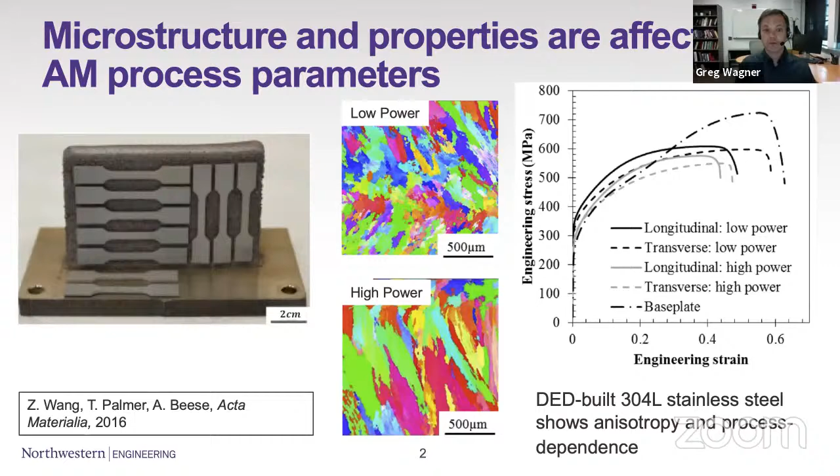So here's some work from the Penn State group, where for a directed energy deposition experiment, they ran the same build with both low and high power, and saw an obvious difference in the resulting microstructure, right? So smaller grains for the low power case. And there's a resulting difference in the material properties too. As you might expect with the smaller grains, the low power case ends up with a little bit higher failure strength. And there's also an obvious anisotropy because of the anisotropy of the build and the resulting structure.

And it can affect not just properties, but even whether or not a particular material can be built. We know that there are materials like aluminum that don't lend themselves very well to additive manufacturing. Typically, these are the same materials that don't lend themselves to welding, and a lot of times it's because they have phenomena like hot cracking. So this paper from a few years ago in Nature demonstrated that this 7000 series aluminum, under standard additive manufacturing conditions, developed cracks, and here's the resulting stress strain curve: essentially they couldn't get a coherent material that could bear a load.

But by inoculating it with zirconium nanoparticles, they were able to get a finer grain structure. This finer grain structure alleviated a lot of the problems with cracking, and led to a much stronger material, and maybe just as importantly, a material that could be built with additive manufacturing. So these are two examples of ways in which the process can affect the properties and the buildability of a particular material.

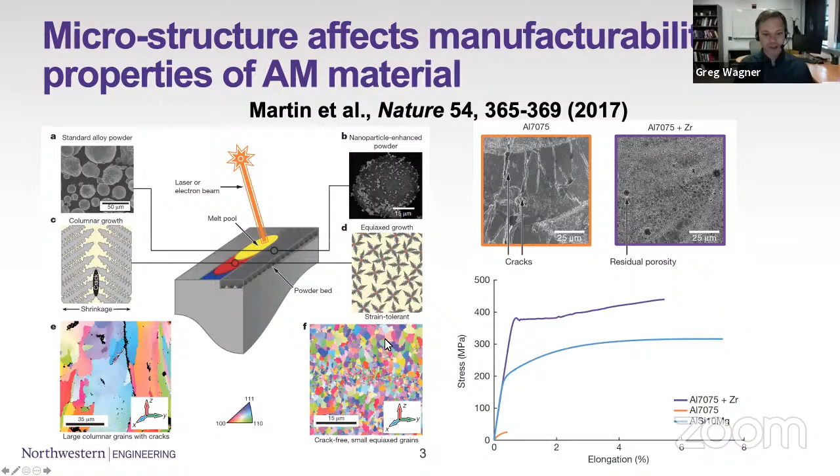So in my group, we focus on simulations, and my background is mostly on development of numerical methods and how they can be applied to problems like this.

We're looking at this problem at a few different scales, and I'll talk about a couple of these in today's talk. So we have active work on part scale modeling. So this is trying to predict, in particular, the temperature field in our case, over a build, over many layers. So think about the multiple millimeters or centimeter scales.

We are also interested in modeling down at the powder or the melt pool scale. So this is now down at the hundreds of microns scale. And this is where those multi-phase or moving interface simulation techniques come in. And we also coupled those types of results to microstructure formation models. And I'm not going to talk as much about that today, but this is also an area of interest for us.

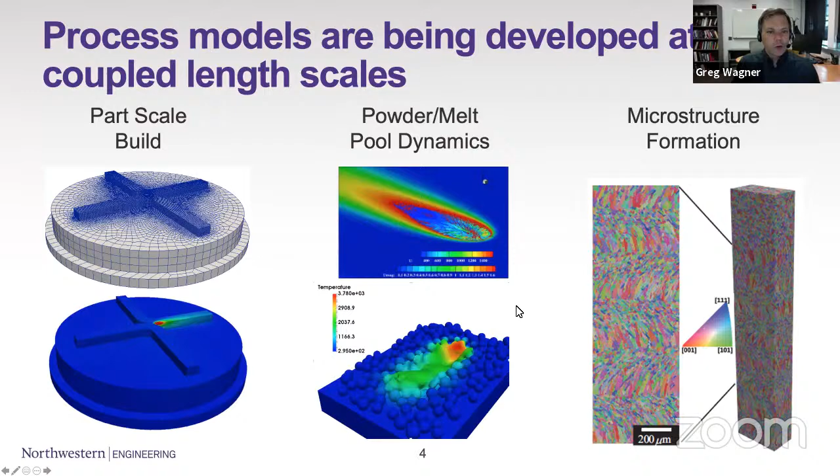So what I will talk about on these first two cases, I'm going to talk about some of our modeling techniques, but then also talk about how we're using some data-driven or machine learning methods in order to, I think, extend the usefulness of our results. So two kind of mini stories that I'm going to tell, first at the part scale and then at the powder scale.

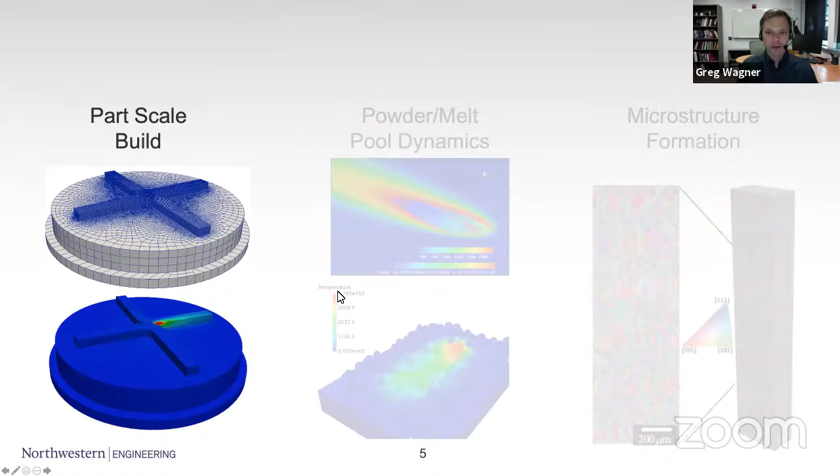So on the part scale, we have developed a finite element model of the thermal history throughout a part. And this is a fairly straightforward model. It's just solving the heat equation in enthalpy form. And this allows us, I don't know how well movies are coming across on the video, sorry. But we can build a part, trace the thermal history throughout the part.

Basically, what we're doing is tracking the same laser path in detail, right, at the kind of laser scale. So we're capturing all of the details in the laser path, the material addition. As material gets added, of course, the complexities in the simulation are that you change your boundaries and you're activating elements and things like that. But a lot of this turns out to be bookkeeping.

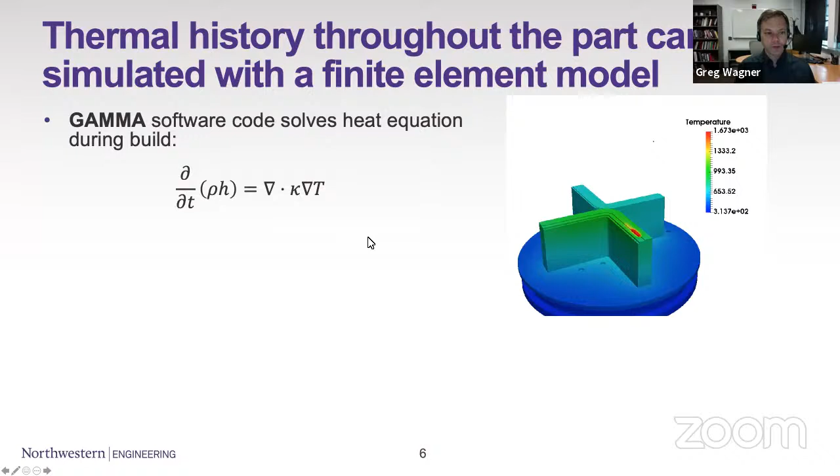The formulation that we're using in this case is an effective specific heat model. So we're capturing the latent heat in this case, but we're capturing it through a modified specific heat that basically has this kind of smeared out jump condition across the solidification of the liquid, the solidus to liquidus region. So the model itself is fairly straightforward.

One problem with models like this, if you've worked with them at all, is validating the temperature history out of these. There are still very few ways to get detailed and accurate temperature measurements from an additive manufacturing build, whether it's the directed energy deposition or powder bed fusion process. It's hard to get thermocouples or things like that very close.

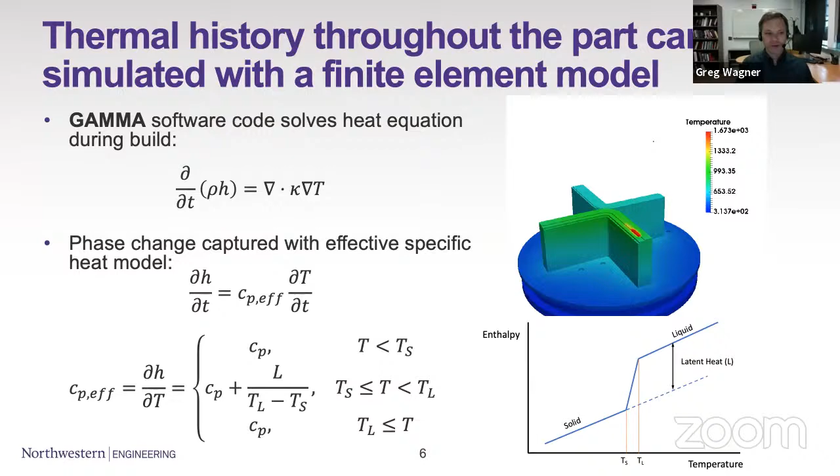So one way where this can be done, at least with some relative accuracy that takes some calibration, is through IR camera data. So we've taken advantage of this in order to try to validate our part scale models. So these are experiments that were done by basically a Northwestern grad student in a group that we collaborate with,

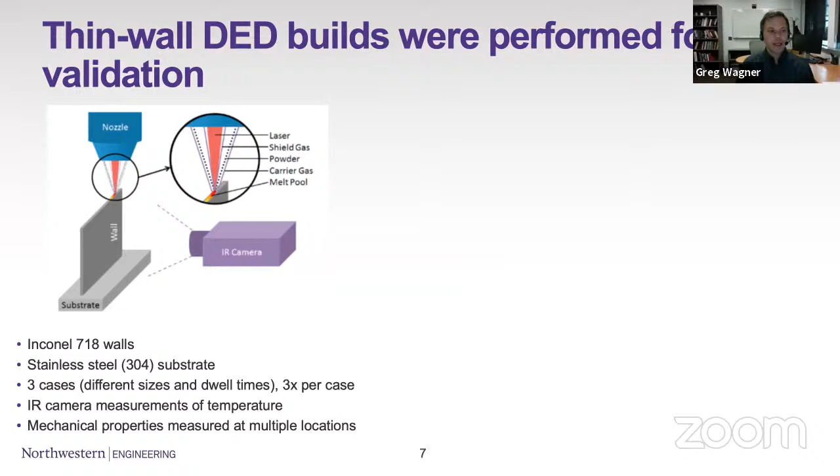where she built several Inconel walls, Inconel 718, 3 different size walls, or 3 different sets of process parameters at least, so different sizes and dwell times for these different walls, and used IR camera data in order to get temperature histories. By the way, Jennifer Bennett was the student who did this work. She is now an assistant professor, or about to start as an assistant professor at West Point.

So this allowed us to get temperature data throughout the part, or at least on the surface of the part, as a function of time. Each one of these walls had a number of sample points, either 9 or 12, depending on the size of the wall.

And so in addition, we were able to take sample specimens from these walls and measure the mechanical properties. So things like the elastic modulus. With tensile tests, we got the stress and strain at yield and failure. And UTS is one that I'll show in a few cases here, the ultimate tensile stress.

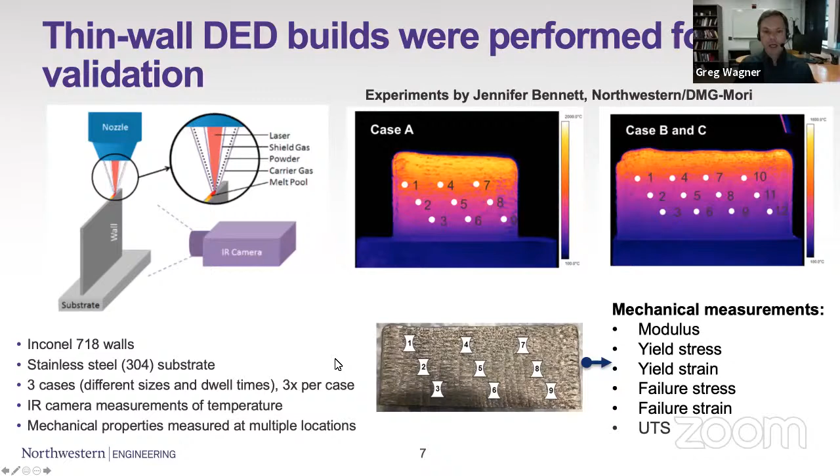So we have a number of points where we have both a measured temperature field, at least we have IR data that purports to give us a measured temperature field. We have property data at those same points. To that, of course, we can add our simulation. So we simulated the same case using our finite element code.

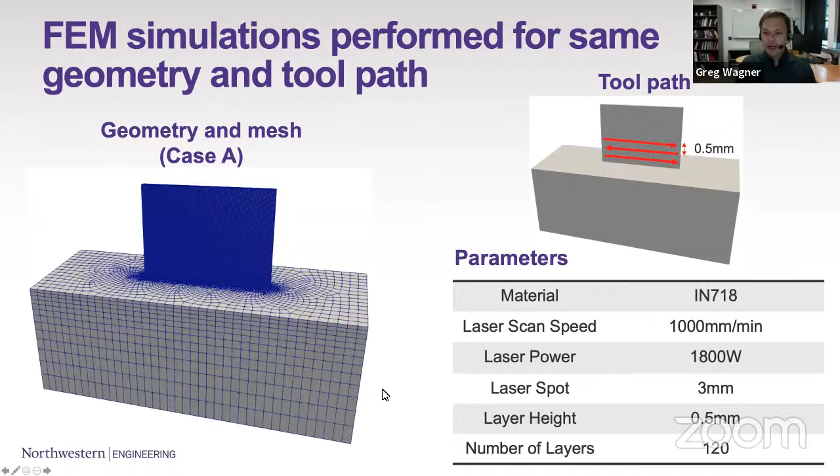The mesh, or representative mesh, is what you see on the left here. The toolpath was fairly simple, just a single scan wall with a layer height of 0.5 millimeter. So this is a directed energy deposition where the scale itself is fairly large compared to a typical powder bed method. And so we were able to simulate that same case.

It starts to cool. One other thing you can note is that the experiments are not able to capture the initial heating of each point very well. So the region through the actual melting temperature, which is about 1400 or 1500 degrees K in this case, the experiments are not getting data there. And in part, it's because the emissivity of this material is changing as it changes phase, and so it's hard to get reliable data, at least in these experiments that were done here, from the melt pool or from that melt bead itself.

So in a way, the simulation at least predicts that we get above the melting temperature, which the experimental data doesn't show. I think in that initial heat up region, the simulations are probably the best data that we have to work with. So if we're interested in cooling rates and things like that, it's the simulation data that we want to be able to query for that. And that's important because, of course, that's what we'd like to be able to correlate with the properties.

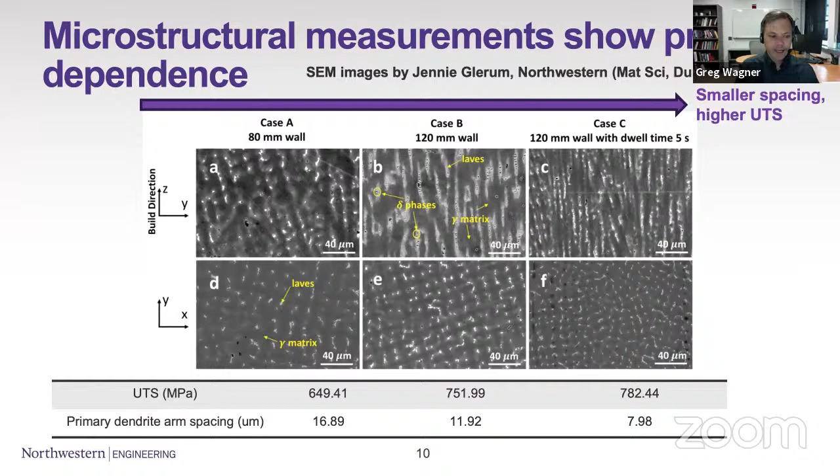Looking a little bit more in depth at that, we can compare that with the simulation data. And again, this particular result is not so surprising. So if we look at data across those 3 cases, and compare first the computed cooling rate. So this is from our finite element simulation, these bars on the left. Everything here is normalized according to the mean. So 1.0 would be our average case across these. So across these 3 cases, the cooling rate is increasing.

It's really just a result of the fact that there's a longer amount of time in between each laser pass or between each build pass at this scale. So the cooling rate is increasing across those 3 cases. The dendrite arm spacing decreases across those. And then there's a resulting change in the material properties for each of those different microstructures. So the strength in particular goes up as the microstructure gets smaller, which again is fairly well expected. So that's great. So we can use our temperature histories in order to back out a cooling rate and say something at least about the expected microstructure and properties.

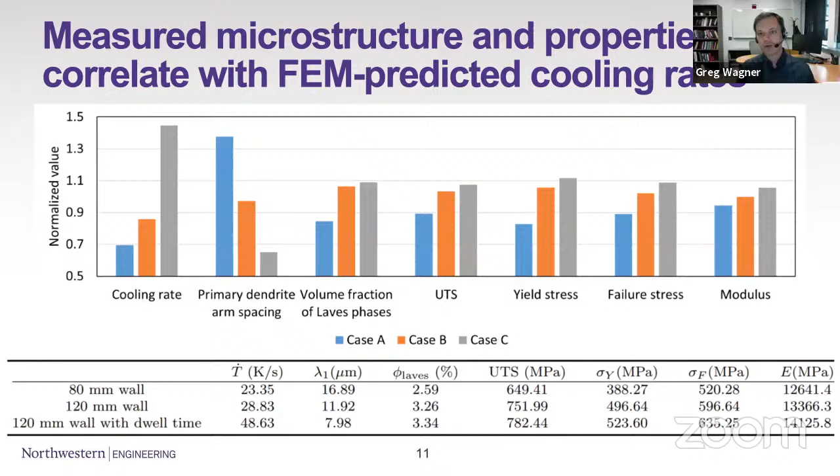Things get a little bit harder to understand. So those were averages over each wall. If we look at individual locations in each wall, though, the story gets a little bit murkier. So if we take 3 different points in a single wall and look at their temperature histories, if you think about it, it makes sense. So point 1 is toward the top of the wall, point 8 is toward the middle, point 12 is more toward the bottom.

Toward the bottom of the build, the cooling rate is the highest because that's where you're closest to the substrate. You're conducting heat away most quickly. Toward the top of the wall, you've already built up residual heat, so your cooling rate has slowed down. And our temperature histories predict that. By the way, when we compute the cooling rate here, we're talking about the solidification cooling rate.

So we're talking about the temperature rate of change as you pass through that solidification region for the last time. So really, it's ignoring in a way everything that goes on after that last solidification step. And you're probably already looking at these results, and you see the trend is not so clear anymore. So our cooling rates are increasing as you move down the wall. Even the dendrite spacing, which itself is a hard measurement, is not showing this trend.

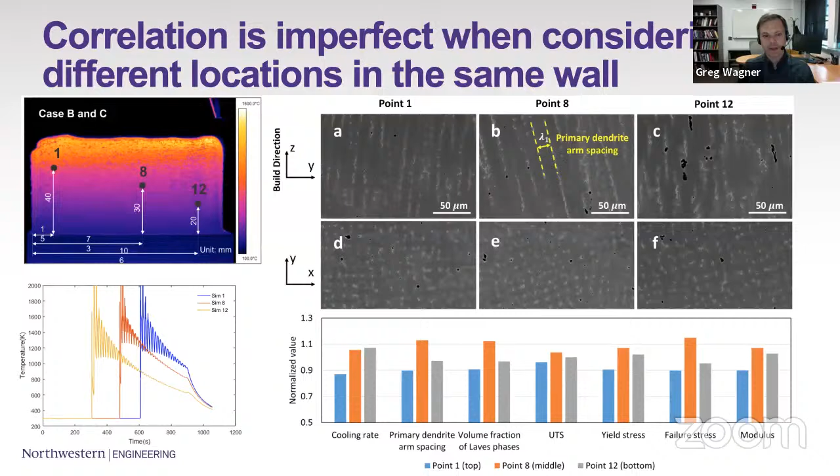But pretty clearly the strength is different in the middle of the wall compared with the other points. And this is a trend that we see across multiple walls in different locations. And so for some reason, the cooling rate by itself is not such a good indicator. It is for the points, and so let me remind you, we have mechanical testing data for all of those, order of 100 points, samples across the walls, but we only have microstructure measurements for a subset of those.

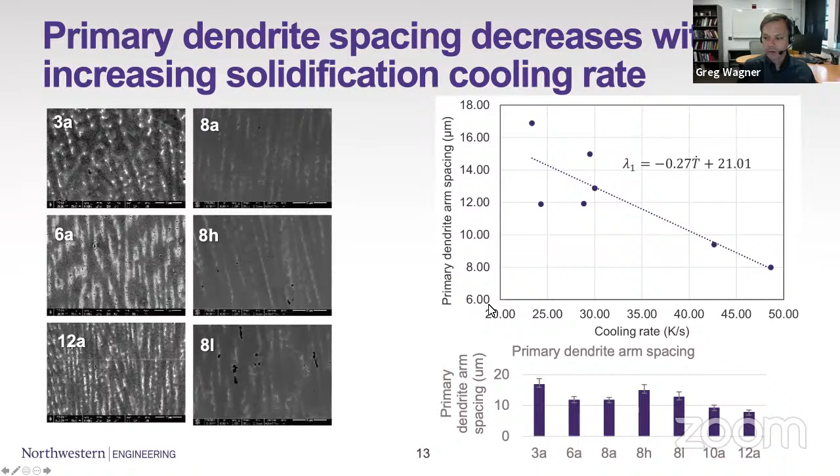And so we can see that our predicted cooling rate tracks fairly well with the primary dendrite arm spacing. Again, as you might expect, as the cooling rate increases, the microstructure gets finer, the arm spacing goes down. But when we try to relate that cooling rate to the UTS for all of the points that we have, it's a lot harder to tell this story, right? So the cooling rate versus UTS here, these are the three different walls, three different wall cases.

What we would hope to see here is that we could plot a trend line and at least up to some kind of uncertainty be able to see a slope in this data. But that slope is just really not there. And I think that the relationship between cooling rate alone and UTS is not so clear. So this was sort of disappointing. So clearly, though, there's something about the temperature history that is affecting the properties, and we want to be able to look in a little bit more detail.

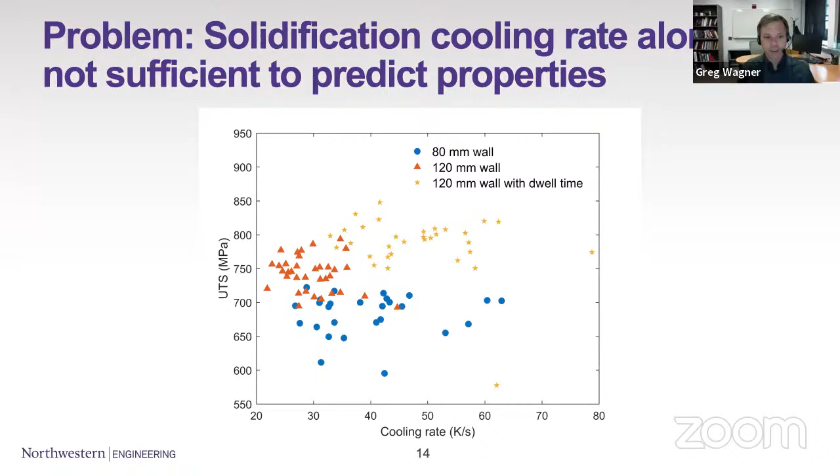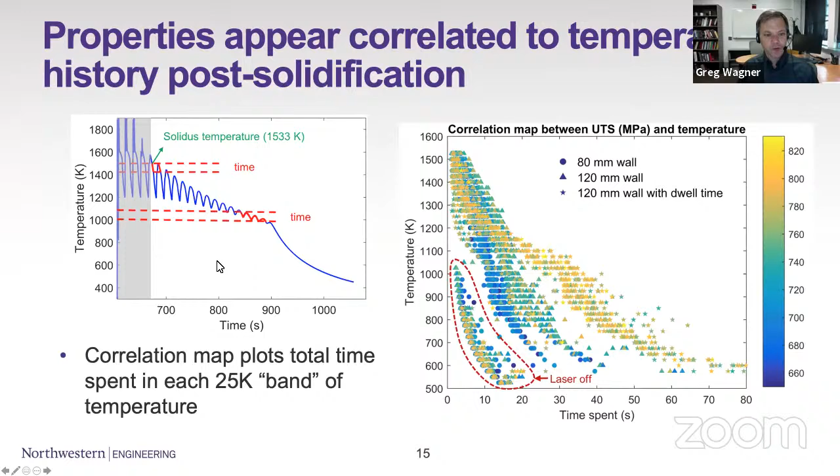And we could speculate about, is there a phase change or some kind of precipitation that's happening in that region that's being caused by the amount of time at that temperature regime. But in order to actually take a temperature history and do more than sort of wave our hands at it and try to see what's going on, we wanted to do something a little bit more quantitative with this. So we took these temperature histories and fed them through a neural network. And in this case, a 1D convolutional neural network, or CNN.

And what a CNN is good at is picking out these features, these sort of hidden features that might not be obvious, or at least be hard to describe quantitatively in some other way. So each one of the CNN blocks is taking this data, reducing it to a number of features, and trying to pick out through these individual filter channels the features that end up being related to the UTS. So the output of the CNN, I'll show this in a second, are these features. Then through a fully connected neural network, we're relating this to the ultimate tensile strength.

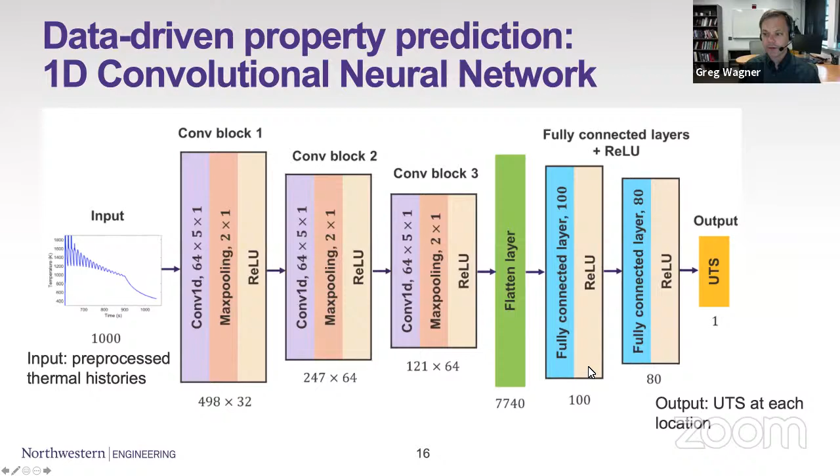And if we train our network then using that data, the training data, which we expect to be good because we're sort of fitting this, is a good match. But if we take that model then and apply it to the test data that we've set aside, we find that now, unlike that cooling rate prediction, our predicted UTS is actually very good.

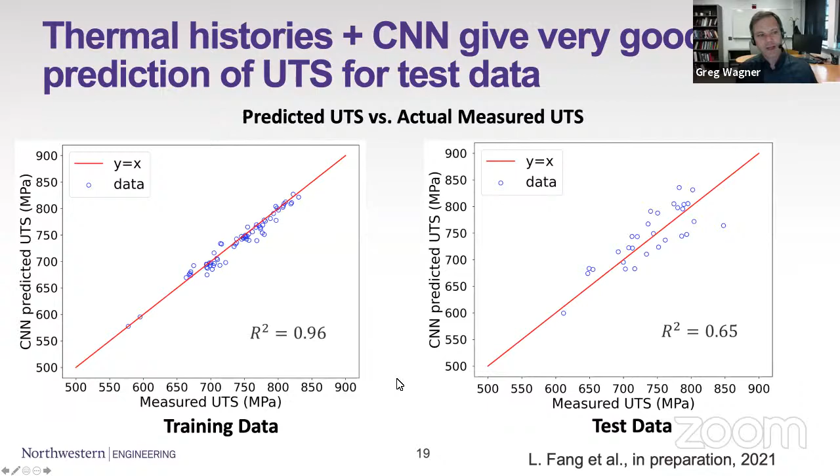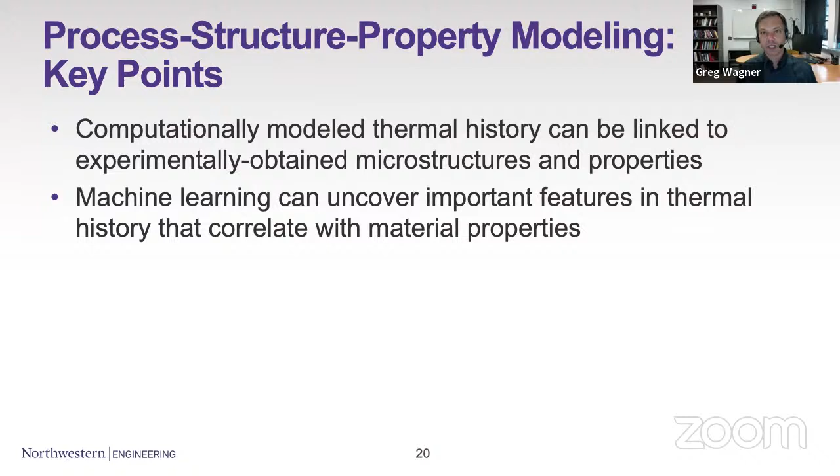So this is sort of our story on this part scale model. So just to summarize this, our goal, of course, in everything is to link our computed thermal histories in some way to the experimentally measured microstructures and properties in order to build models. We're finding that machine learning, more than our more traditional methods like looking at cooling rates, is able to uncover some of the important features in this thermal history that correlate with the material properties. And now the challenge, I think, is to take those correlations and try to use them to yield insights on what physical mechanisms are causing that.

And we know that a traditional TTT curve for this material may give us information about precipitation or precipitates that form in that region. But AM material, having a different thermal history, may look different from a typical TTT curve, and so these are often insights that only this type of analysis of the data can give us for this AM type of material. And so that's the goal now. And of course, the goal is to be able to take this tool and use it to optimize processes and design process parameters such that we can optimize the eventual properties.

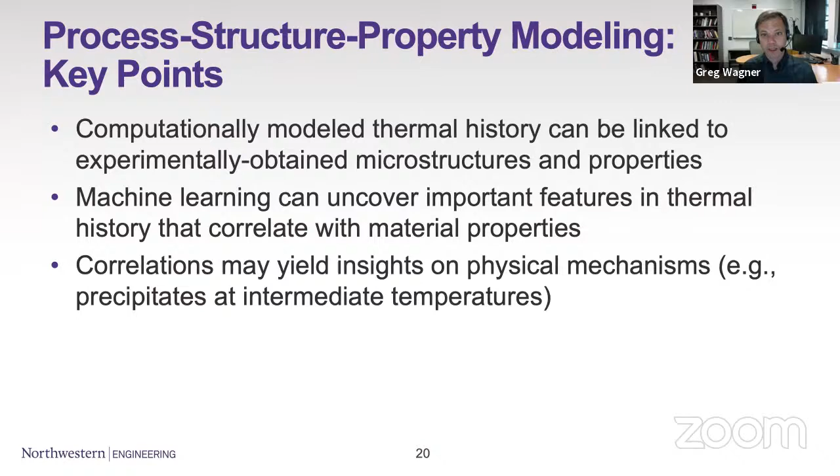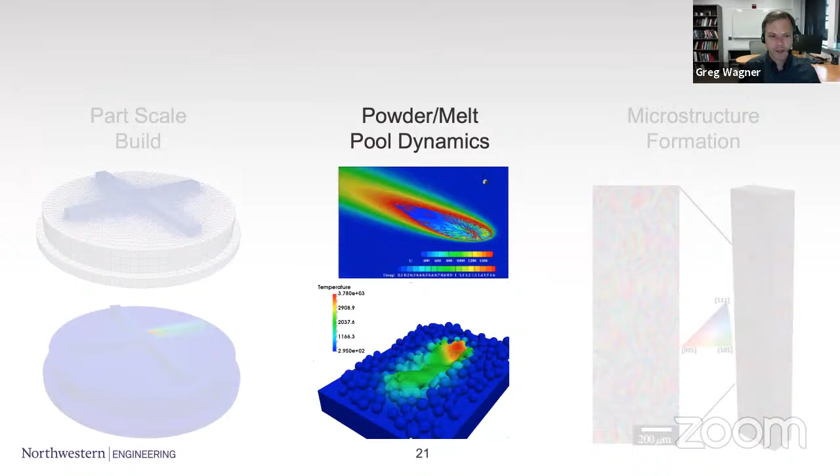Okay, so let me say then a little bit more about some of our powder or melt pool scale models. And some of this, if you saw my talk a couple of years ago at SimAM, will be a review. But since then, I think the publication has come out, and so you can look at some of this data. Again, I'm not sure how well these videos come out, but this is the sort of thing that is motivating many of our simulations. So this is work done by our collaborators here at Northwestern. This is actually using the Argonne National Lab Advanced Photon Source to gather high-speed X-ray data.

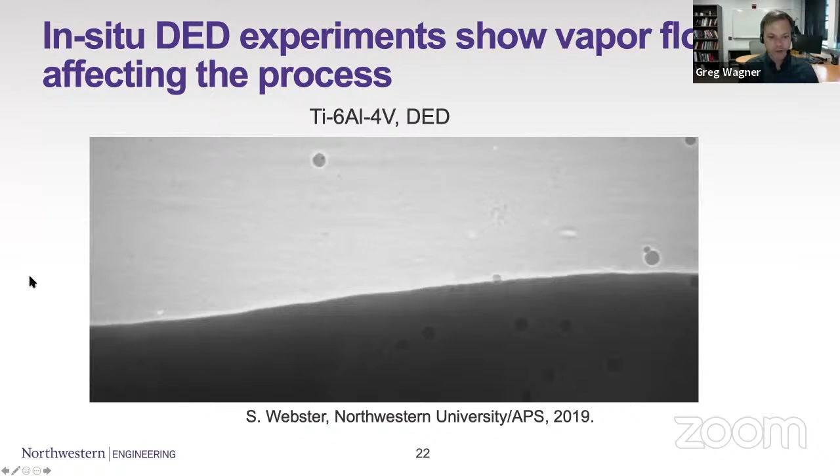This is of a DED process. Let me go back and start this over if I can do that. In this case, the powder is being injected and not blown at a high rate, but you can see a couple of things here, that there are interactions between the powder and what is clearly some kind of vaporization plume coming from the melt pool. So these powder particles are getting entrained in the vapor. And so there's this clear interaction between the melt pool, the surrounding vapor, and the powder that's being injected. These are all things that we'd like to be able to understand. One interesting phenomenon, again, these are our collaborators in the experimental group here at Northwestern.

One interesting phenomenon that was found in similar experiments was that sometimes powder particles are clearly not just blown away by the vapor plume, but once they get kind of entrained in the laser itself, they seem to move in the direction of the laser toward the substrate. And there was some discussion over what's going on here. Why does this particle all of a sudden change directions as it moves into the laser?

And finally, what we realized is that it's all coming from the vaporization force on this individual particle, right? It's like setting off a little rocket tail, a comet tail on this particle as it enters the laser beam. The top side of it is evaporating. You're getting a vaporization pressure on the powder particle, and that's then driving it.

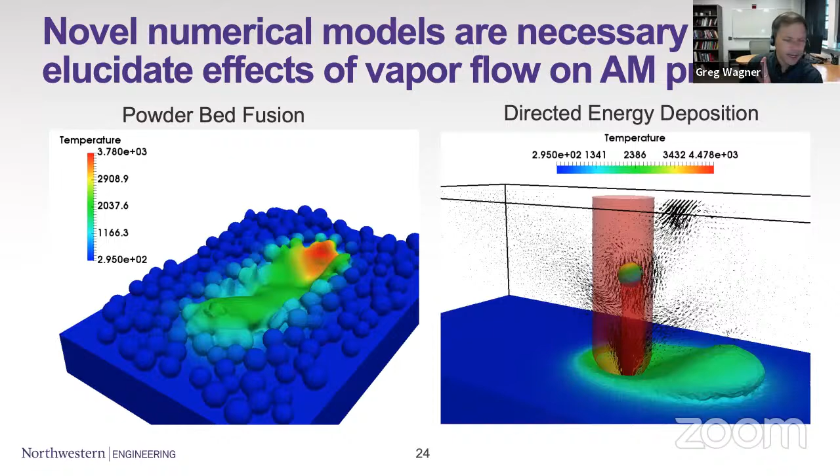So we've developed models and multi-phase simulation techniques that allow us to simulate this sort of moving interface with evaporation problem, both at the powder bed scale for powder bed fusion problems and for DED problems, where we can look at the injection of powder particles and their interaction with the laser and with the melt pool. I'm going to spend a few minutes on the formulation for that and some of the results.

So we are solving the full Navier-Stokes equations. I don't like to show too many equations, but I want to be able to at least point out some of the modeling choices that we've made here. I'll go into a little more detail on the next slide. We're solving a diffuse level set equation in order to track the moving interface. So we have a surface force, a continuum surface force in this case, that represents forces like the surface tension force, Marangoni forces, and the vaporization forces at that melt pool.

We have a penalty term in the solid region that constrains the velocity to zero. This is a fairly common way of handling these kind of solid to liquid phase changes. Gravitational forces and evaporation forces then at the surface themselves.

In our continuity equation, we're assuming that our two individual phases, metal and gas, are constant volume, but at the surface itself, we can have evaporation, and this leads to a volume change right near the surface. And so this is where this additional source term comes in: instead of divergence of u equals 0, we have divergence of u equals that volume change that's happening at the surface.

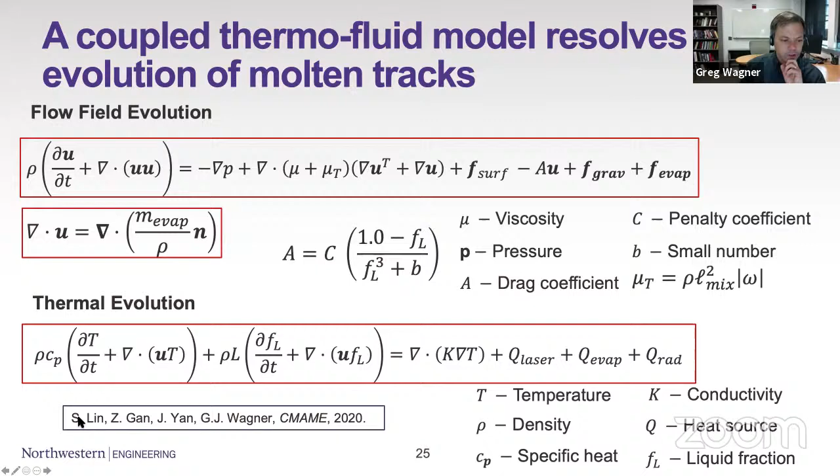To that, we can couple our thermal evolution problem. So again, now we're solving the heat equation with convection and phase change. So we have a liquid fraction term that's capturing the phase change. And again, we have an evaporative heat loss at the surface. Again, this formulation has now been published in CMAME last year and is largely the work of my former grad student, Stephen Lin, who's now at Sandia National Labs.

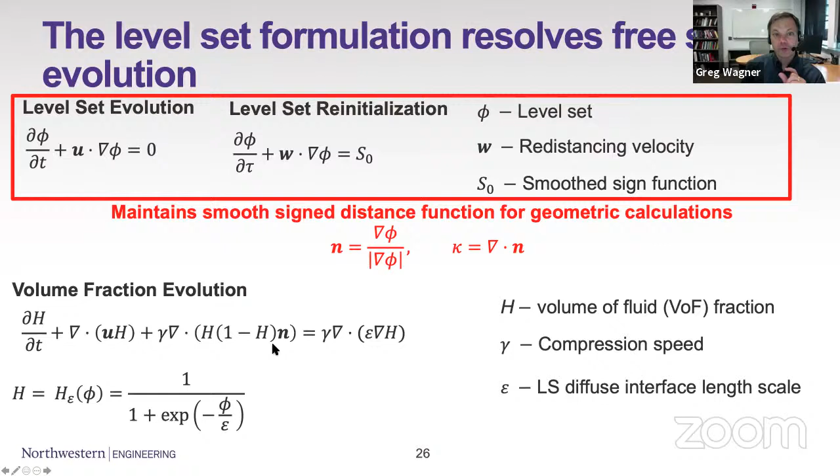We're tracking the moving interface using a level set formulation. I want to keep an eye on my time a little bit to make sure I don't fall too far behind. And in order to better conserve mass, we're coupling this to a volume fraction evolution equation that, taken together with our level set, allows us to improve the mass conservation or the mass losses that you often get in a level set formulation.

So the level set itself we're using to maintain a signed distance function, and in particular to be able to compute normal vectors, which is hard to do from a volume fraction equation. The volume fraction evolution equation is then solved separately, and that's what's getting used to actually enforce the local conservation.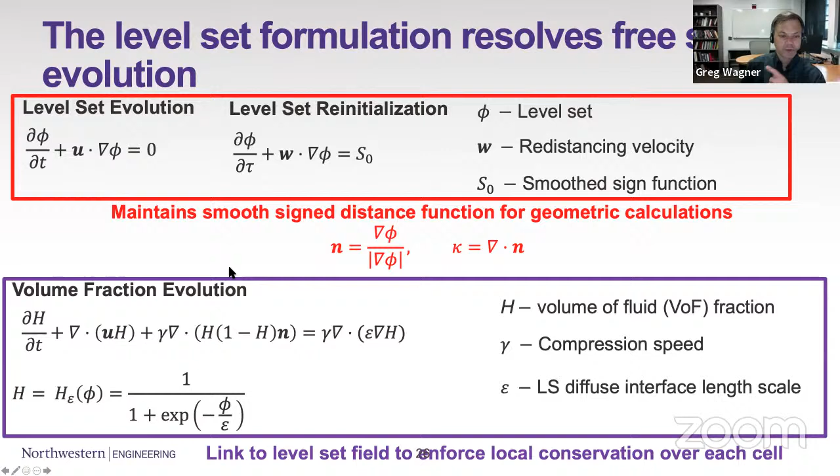So we didn't invent this technique. There are others using a combination of these two equations in order to conserve volume or mass in level set formulations. But we've kind of modified it for our unstructured mesh problem, especially for a case where we want to enforce a balanced force algorithm.

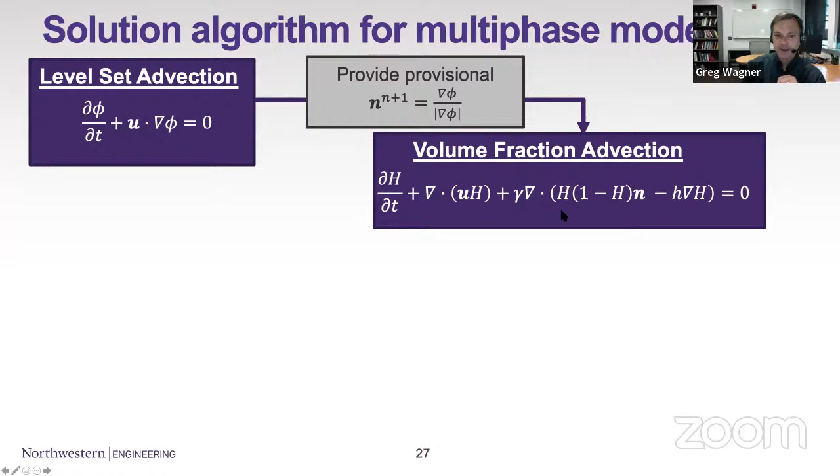So our algorithm looks something like this. We solve that level set equation. We get a provisional set of normal vectors. We use the normal vector then to solve for the volume fraction. So I'm going through this a little bit quickly, but I want to give you a sense for the algorithm.

Then we use that updated volume fraction to redistance our level set, and we end up with a recalculated normal vector at each point. And those are the normal vectors that we can use in order to compute things like surface tension and the evaporation forces in our thermal and fluids problem. So finally, we solve for the fluid temperature.

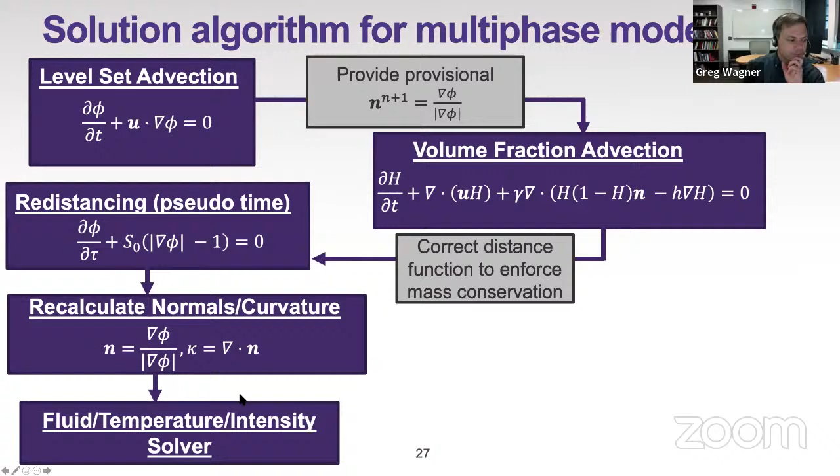One more equation that we add to this: we weren't able to implement in our parallel code any sort of ray tracing method in order to track the radiative transport. What we modeled instead was a unidirectional radiative transport equation. We wanted to capture effects like the shadowing of particles, right?

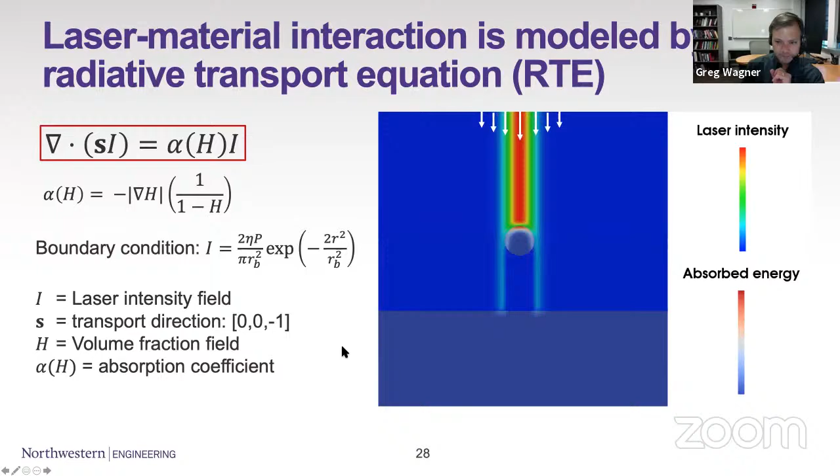So if you have a laser that is incident on a powder particle, you want to capture the fact that the substrate underneath it is going to be shadowed, whether that powder particle is flying through the space above the substrate or is actually sitting on the substrate. So we're solving for a laser intensity field that can be absorbed at the surface of either a powder particle or the substrate. And that gives us this shadowing effect automatically.

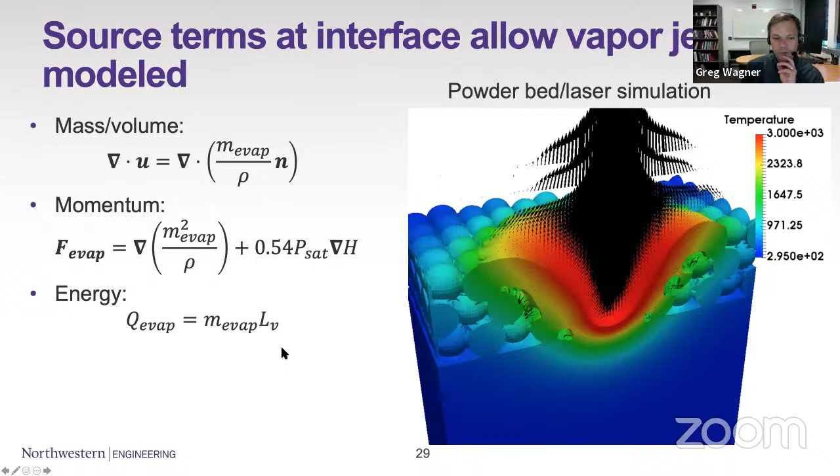All right, so finally, the interface treatment and the fact that we're coupled to this surrounding vapor allows us to capture at least a little bit of this vapor plume that you get near the evaporation region. So the recoil force at the surface is giving us this keyhole-like behavior, and the coupling to the surrounding vapor through our continuity source term is giving us the vapor plume. So we can look at the combination of these and the interaction of these things.

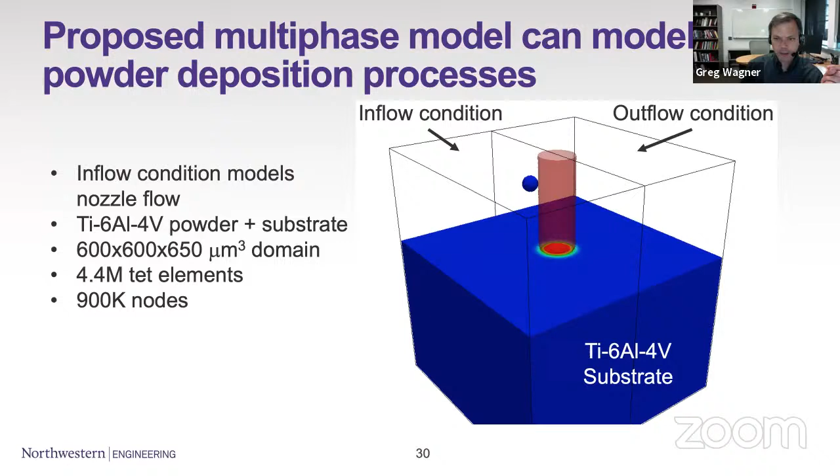So we can use this type of model to look at individual phenomena in, say, a directed energy deposition. So let me show a couple of short examples of the sorts of things we can do with this, as a proof of concept. So we've simulated a moving laser on a substrate and looked at the injection of powder particles above this, not quite at the powder number density that you have for a full DED simulation, but to be able to test the effects of individual powder particles and the phenomena that we see.

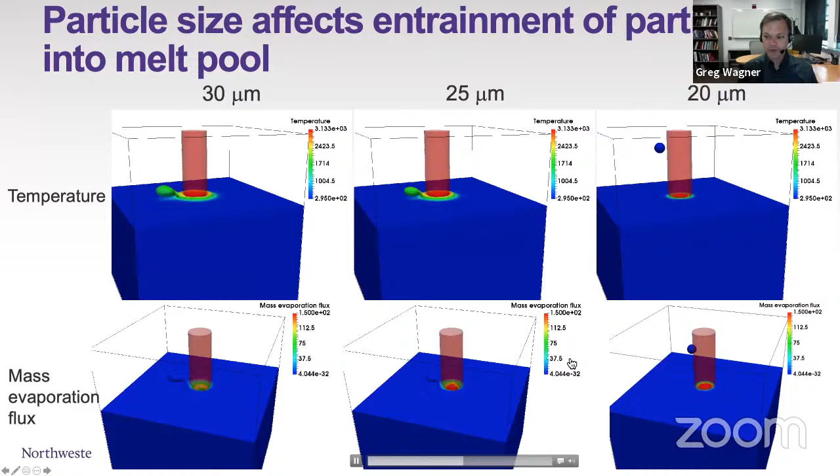Another thing we can look at is the effects of the particle shadowing on the melt pool. And this again is something that was seen in those high-speed X-ray videos, where often a powder particle will kind of occlude the laser and lead to a reduction in the vaporization, or a reduction in the keyholing in the melt pool. And we see exactly that.

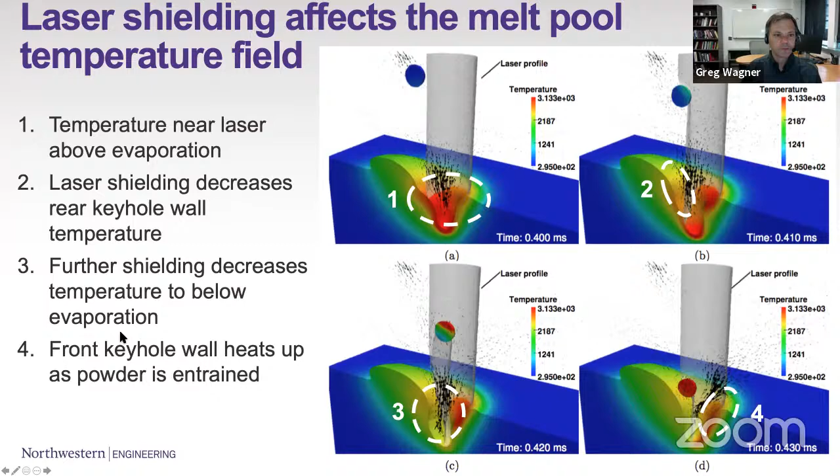Okay, so this is a tool that we've developed for the melt pool, but in fact, it's hard to take that information and use it directly in, say, a part scale simulation, right? How do you use this in order to design a process, especially given that there are so many effects that are coupled between what's going on at the melt pool, what's going on in your part geometry, and your heat transport there.

And this, I think, is still an open question in much of the modeling for AM: where is the coupling between our fine scale melt pool models and the part scale models that one might actually want to use to design a better process?

So we are interested in figuring out, how do you account for those melt pool details in the part scale solutions? So how do you take what we've done at that fine scale and then build it into our directed energy deposition code? What I'm going to show is sort of a first step along these lines, and it's definitely not the full answer to that.

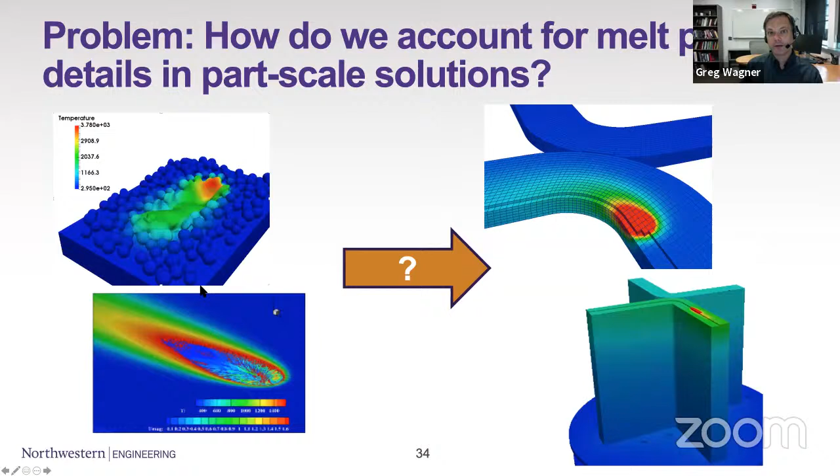I like to think of this problem in two ways, or as two separate subproblems. One is the fast prediction of these melt pools, right? So we want to be able to take the data that we've developed through our melt pool simulations and use that to come up with reduced order or fast models to predict the melt pool temperature or velocity. And the second is the coupling itself, and how do you build that in?

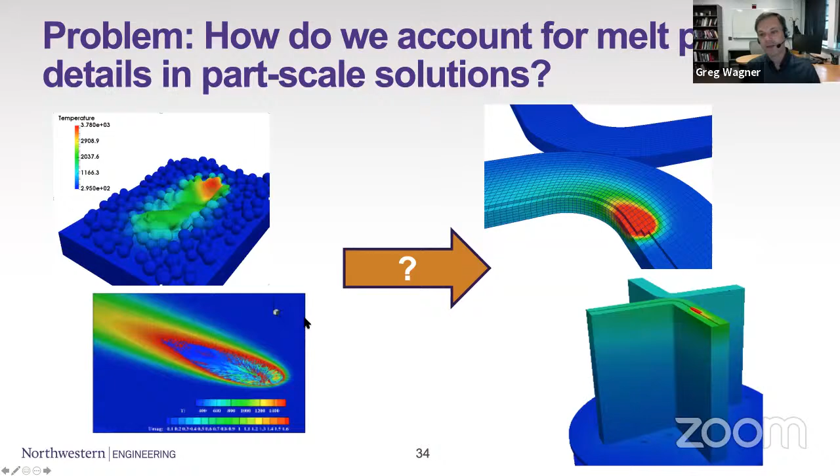So we have active work on the second of those problems, but what I'm really going to show is the first piece of that. How do we take our melt pool data and use it to develop reduced order models for that melt pool velocity that then we can further couple to our part scale?

And so for this, I'm going to fall back on the machine learning approach. I want to call out in particular my postdoc, Lin Cheng, who's been working on this. And he has developed, this is largely his brainchild, what we're calling a RVE-net, a representative volume element neural network. And it has some things in common with physics-informed neural networks or other types of neural networks.

The difference here is really that it starts with an image-based representation of the input fields and uses a convolutional neural network through an encoder and a decoder in order to relate the hidden variables. So, this is described here, and I understand this in sort of a high-level way, but I want to get the main idea across. So the inputs, this is a case looking at just the strain field in a composite that's made up of particles. This is not an AM problem, not an AM process problem, at least.

The inputs, though, are representations of your microstructure in this case, and also some representation of the load condition as additional parameters. So this is like a voxelized or pixelized representation of your microstructure. The goal of the output is the strain fields in this case. And those strain fields then get fed into various manipulations that allow us to evaluate a loss function.

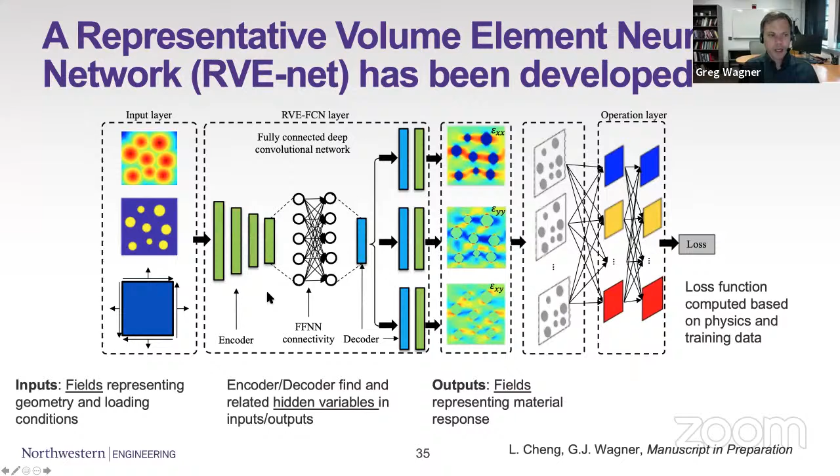And this has been demonstrated, in a work that will be submitted very soon, for some solid mechanics problems. And we've recently demonstrated this as well for our melt pool simulations. We can train using our fully detailed melt pool simulations, feed them into this network, and get a prediction for later temperatures and velocities in the melt pool.

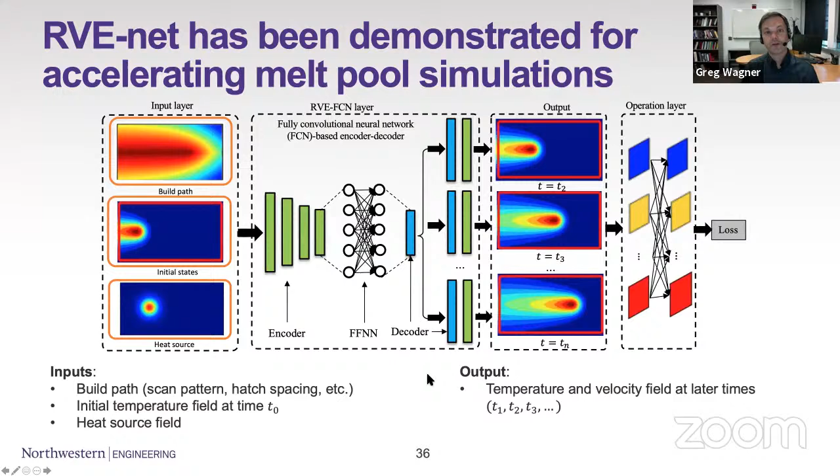So in this case, and again, just very high level of detail here, the inputs are the temperature or velocity at some initial time, an image representation of the build path, and an image representation of the heat source field, so the laser spot, for example. And the outputs are a series of snapshots of the temperature field at later times. And again, these are all being related through this encoder-decoder network. And the loss function in this case is the differences with the training data that comes from our detailed simulations.

So let me just show, let's see. So the ultimate strategy here is to be able to replace our detailed simulations with this neural network evaluation, and then couple that neural network evaluation with the surrounding temperature field in a part scale model, right? So this is kind of the notional diagram of our eventual strategy.

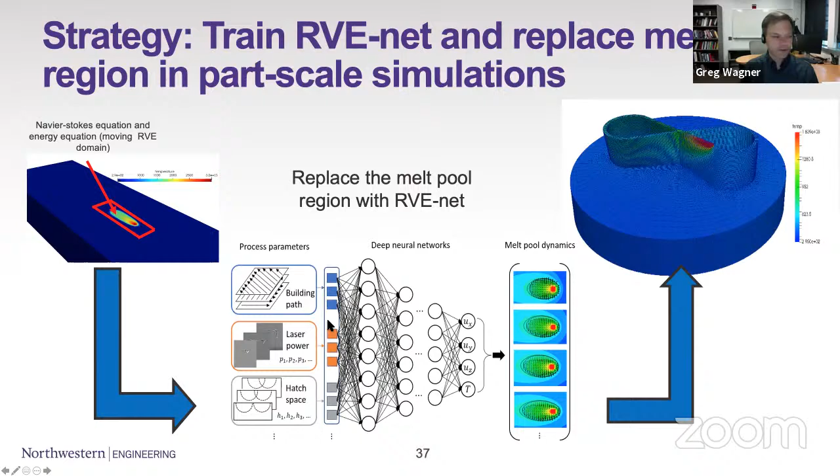Let me show you some preliminary results of both 2- and 3-dimensional melt pool simulations, and that's where I'll quit. So in 2D, it's a little bit easier to see the training process here. So we have some 2D heat equation simulations of the moving laser beam where we have, essentially, a melt pool, laser spot.

This red box is showing kind of our representative volume region, where over this region, we're sampling data over a given amount of time. And that includes both regions where the laser spot is moving in a straight line and where it's turning. We can vary the process parameters and the scan speed and the hatch spacing and things like that in order to gather as much data as possible from these simulations.

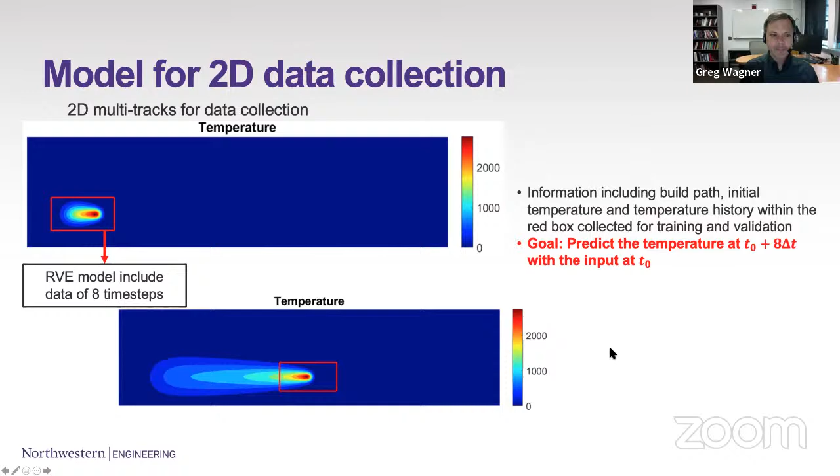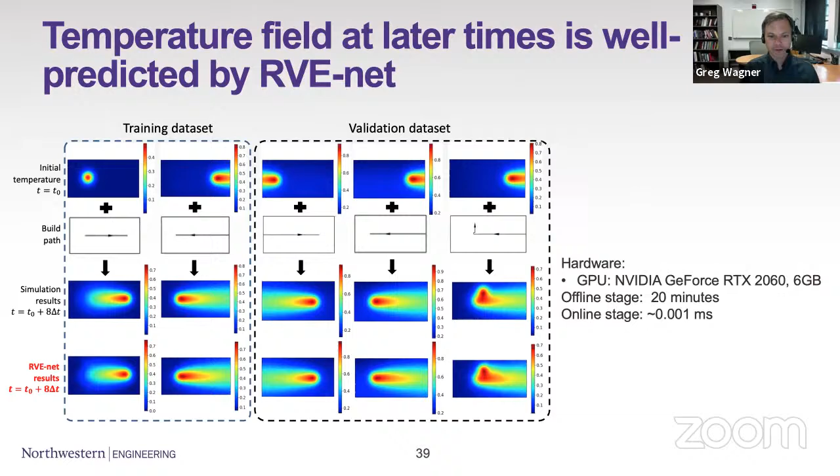In 3D, we're doing something similar, and running our detailed simulations for different laser tracks. So this is a case where we're not tracking all of the moving interface. We're assuming that the interface stays fairly flat, but we are still solving now for the convection in the melt pool and the other physical phenomena at the melt pool. And we're running with a range of different laser powers and scan speeds that would be significant for a typical powder bed process. And we can increase this, the range of process parameters. And we're getting temperatures and velocities for each of these and using these to train our simulations.

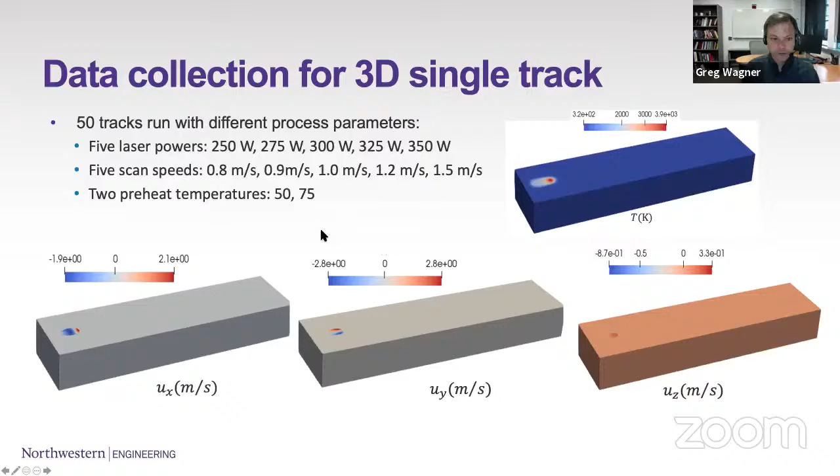And this is what the results look like. And again, these are just preliminary results, but overall, we're really happy with this. So for a given melt pool, we can predict. So the ground truth on the left is the simulation data, the neural network prediction given on the right for a time 20 or so time steps later. Not perfect, but matches the temperature and velocity very well for a particular melt pool size.

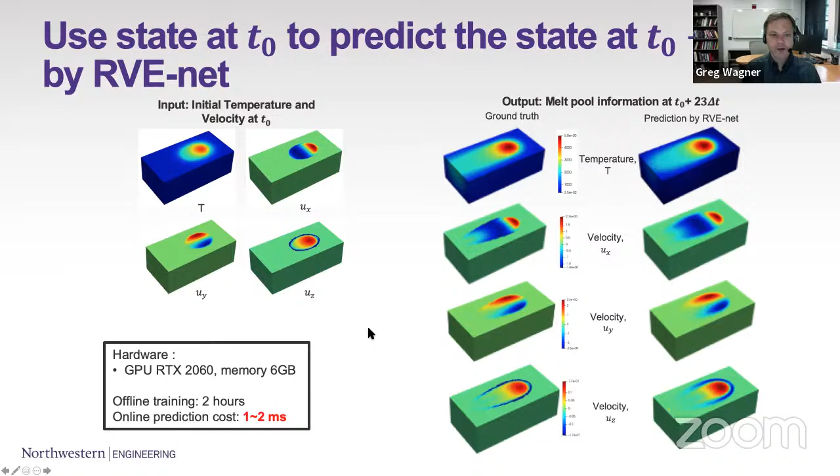And again, we're working on testing this out for different cases, improving the amount of data, and eventually coupling this to the full part scale simulations. Each individual melt pool prediction, and this is the key, can be done in a handful of milliseconds. So this is extremely fast. All right, and so that's where we are on that machine learning piece of things, and that's where I'm going to stop. I think I'm a little over my allotted time.

So the key takeaways that I want to summarize here. So I think that detailed physics simulations combined with machine learning are potentially a way to get fast and accurate predictions of these process structure relations. And that can be both through analyzing the data of the results themselves, or potentially through training reduced order models with our detailed simulations in order to give fast simulations that we can eventually use for coupling or for process design.

This approach to coupling is, like I said, also an area of active work for us in trying to figure out, now that you have that information at the melt pool, how are you coupling it to the part scale model? And of course, the ultimate goal is to be able to take those fast part scale models and to use them to design better processes and to optimize ultimately the properties of the resulting material.

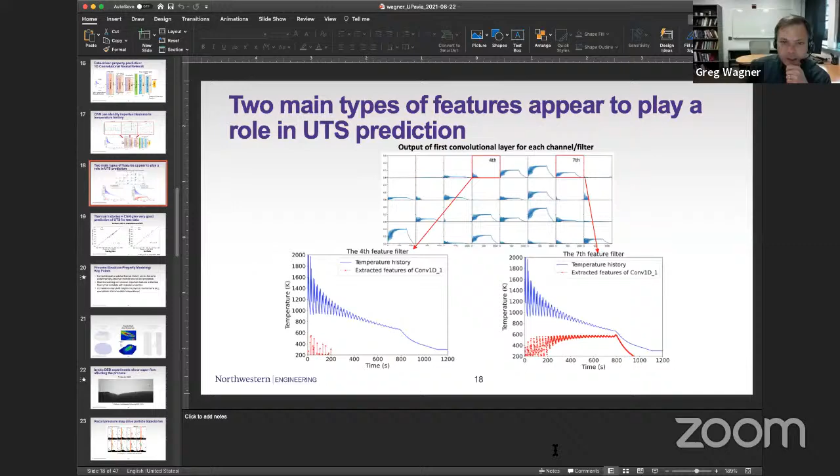But I would argue, let me see if I can share again this slide. This is our takeaway on why the, I've lost my sharing button. Why the solidification cooling rate itself was not enough to explain the change in the UTS, right? And I think that's exactly what you're saying. Correct. There is something going on that is post solidification.

Something that seems to be related to the time that is spent in this 800 plus or minus 200 K region. We haven't been able to identify from the micrographs or from existing TTT curves exactly what's going on here, what particular precipitate this might be. But I think you're exactly right, that this is an indication that there's some sort of solid state transformation happening, driven by how much time you're spending in that intermediate regime, that is causing the change in the UTS.

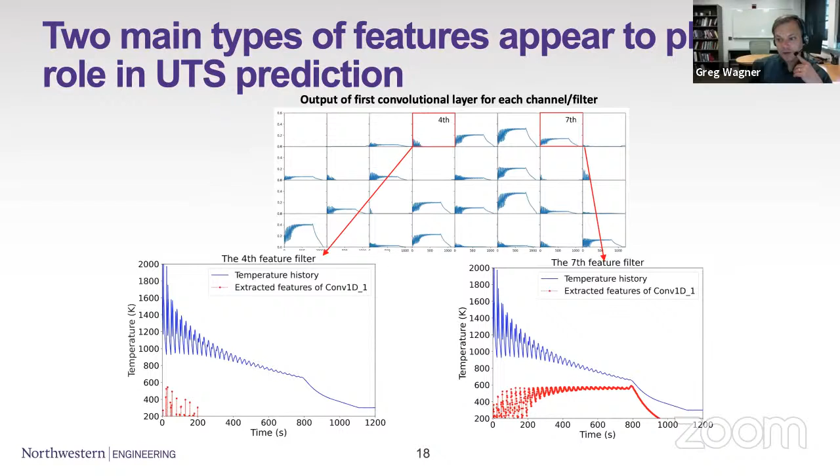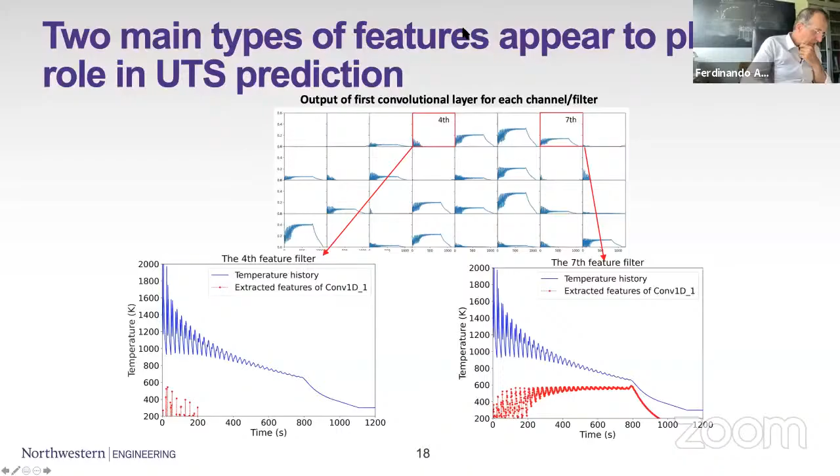Greg, in the slide you were showing at the beginning, there were all these peaks, very high temperature, and this was the part that you were not able to capture with your simulation. Clearly you are interested mainly in the solid range, to capture the effect on the material. But is there any reason why you were not able to capture that? Is it a computational issue, like the element dimension or time integration that you're using? What are the reasons? Because exactly that's the slide.

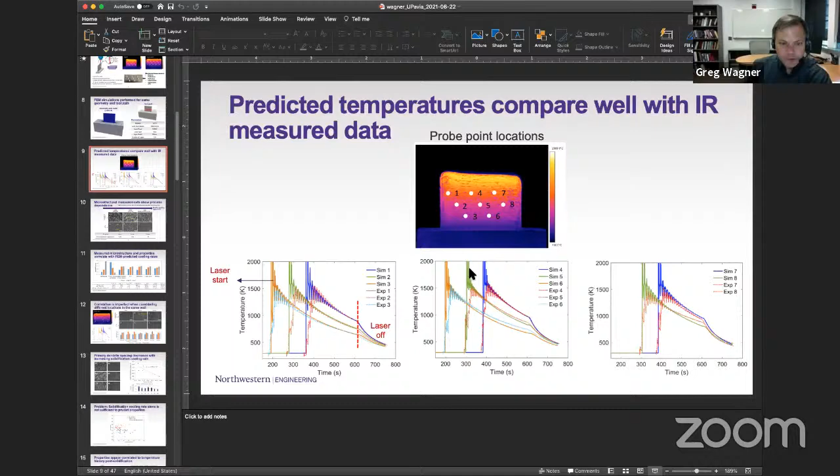Okay, so first let me make sure we're talking about the same thing. Let me blow this up so it's a little easier to see. The dotted lines are the experiments and the solid lines are the simulations. So I would argue it's the experiments that cannot capture the high temperatures above the melting temperature.

I think the main reason is probably that the IR camera is calibrated for the solid. This calibration depends heavily on the emissivity of the material, and the emissivity just doesn't stay the same through that phase change. I think that's part of it. Part of it may also be just the ability to resolve that melt pool volume. Now, that's not to say that I fully trust the simulation, especially in that very high temperature region.

But, you know, there are other things there, like what are the effects of boiling and things like that right near the melt pool, especially at the highest temperature regime, where we're probably not getting it perfectly right, but I'm a lot more confident in it as we get closer to the melting temperature, especially on later passes. So like I said, probably imperfect, but better than the experiment and the best we have to go on for predicting.

Let me make a comment. You're not supposed to complain about your camera, because the movies were so incredible. Already what you are showing from the experimental point of view is really beautiful. You can always do better with experiments and with the numerics, but already the experiments you're performing are really interesting. It's a poor artist who blames his instrument, right? Yeah. And a poor experimentalist who blames the camera.

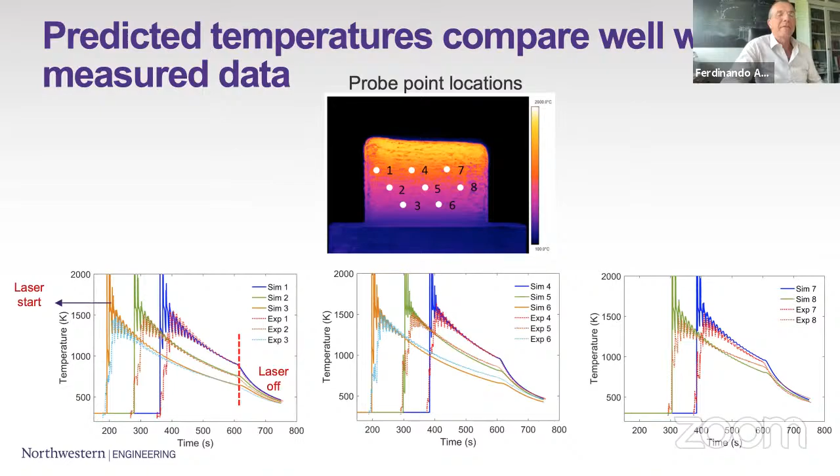I see other questions popping up, so I stop with my questions. So Stefan Kollmannsberger has a couple of questions. Stefan, please. Sure. The one actually connects to the follow-up question, so I'll ask the other one first. Greg, I just walked out of a review of a proposal that we submitted to a large group, and we got all criticized. We suggested you as a reviewer actually, but you weren't picked.

But the thing is, it was all microstructure driven. We had cellular automata in there to compute the microstructure, and phase field models, atomistic simulations and Lattice-Boltzmann methods, very small scale, complicated phenomena methods to then try to steer the microstructure. And the fundamental critique these reviewers had is, why do you care about the microstructure? Because later you do heat treatment and then the microstructure is gone anyways.

And I'm still pissed off at the remark somehow, because the entire proposal was based on predicting sort of upwards. And I think we failed due to these remarks. I'm wondering what I should reply the next time. Yeah, I am familiar with this sort of criticism. In some ways there are points to this criticism, that your as-built microstructure is often not your final microstructure.

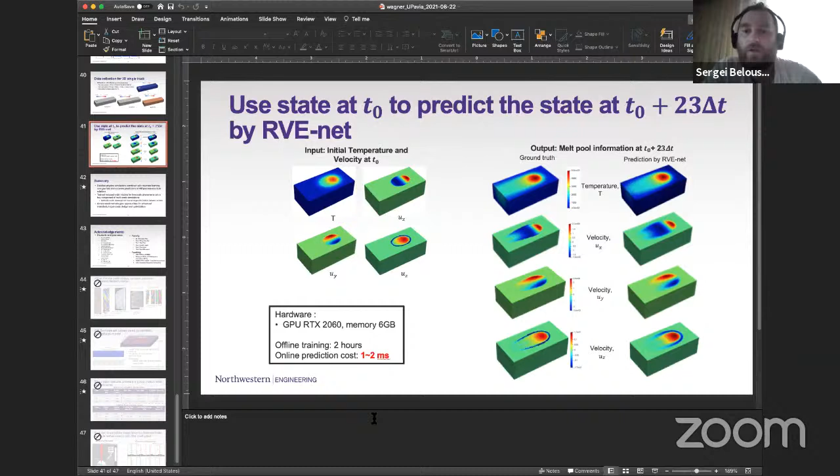But when we have powder, or we have some features, like if we scan the part, we are near the wall or near the edge, there are some things that might be hard for neural model machine learning to predict. So it's not a question, it's just a thought.

Yeah, it's a good point. We definitely haven't solved that yet, at that level of building in powder-scale stochasticity, and whether the neural network could pick that out. It's an interesting question, right?

So you could imagine that that leads to some level of uncertainty in your prediction, and as long as you understand that uncertainty and can build that into your model, maybe there's a way to predict that. But yeah, we certainly haven't solved that. It's a good point. Well, thank you.

Hi, I have also a question, Greg. Actually, two again. Sorry, very short. The first one is about why do you need the latent heat in the part scale model? Yeah, it's a good question, and I've heard many people who have spent more time with it on the part scale saying that they don't find that it makes too much of a difference.

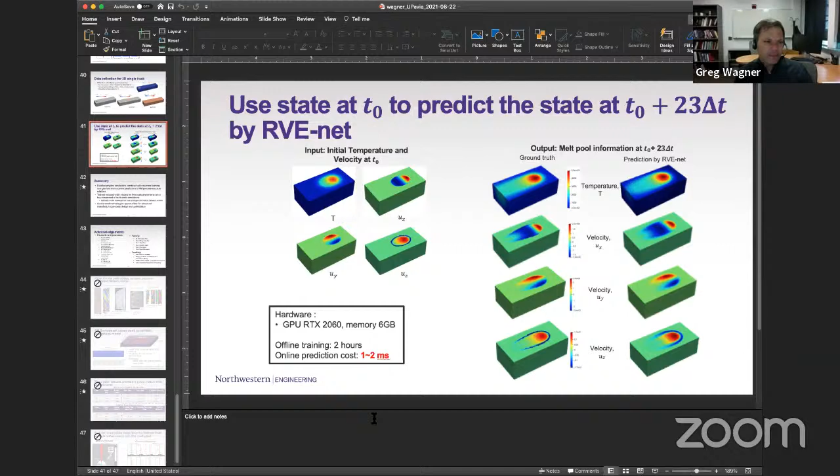I guess in our case, our model was originally developed for cases where we cared both about simulating large parts, and also for cases where we were zooming in and looking at smaller numbers of tracks and looking at shorter timescales. And so in those cases, I think the latent heat does have an effect. I think it's been a little while since we've run this comparison.

My suspicion is that the change in the latent heat would still affect the temperature peaks near the laser itself, near the spot size, and probably would not affect very much the things that might affect, say, residual stress, which, by the way, we're not predicting in our model at all. But my sense is if what you care about is residual stress, you probably can ignore the latent heat and just average over that. But I think there's reason to think that it might be less consequential.

Yeah, I got the point, but exactly because at the end, what you are looking at, if I understood correctly, is more the time that you spend above a certain temperature. So with the latent heat you capture very well the peak and maybe the shoulder in the temperature distribution in the cooling. But at the end, you look at how much time you spend above 600 degrees, for example, then maybe in this case the overheating that you need to see with your model is not really affected by latent heat. That's a good question.